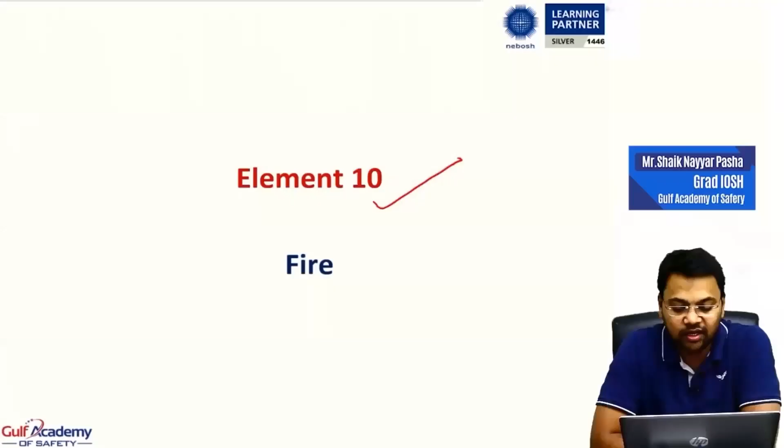The next element we are going to start is element 10, about fire safety. This data is collected from the National Crime Records Bureau, covering fire accidents that happened in India—not every fire accident is included here. I have only selected about 10% of all the fire accidents that happened in India.

On December 8th, 2019, 43 people were killed in a gruesome fire accident in Delhi. 23 students were killed in a Takshashila complex Surat coaching center fire accident in May 2019. In February 2019, a massive fire on the 5th floor of Arpit Palace, Karol Bagh, killed 17 people. 50 cars were gutted in an Aero Show fire, a similar incident in Bengaluru on February 23rd and 24th, 2019. According to sources, the fire started from dry grass and spread rapidly due to strong winds.

13 workers died in a chemical explosion in Mumbai on August 13, 2019. 5 were killed in a Pune cloth godown fire in May 2019. 5 were killed in a Dibrugarh house fire in 2019, triggered by a burning candle. 43 were killed in a massive factory fire in Delhi in August 2020, last year—many victims died of suffocation and smoke inhalation in a building with no ventilation. 9 people died in a cloth godown fire accident in Delhi in December 2019.

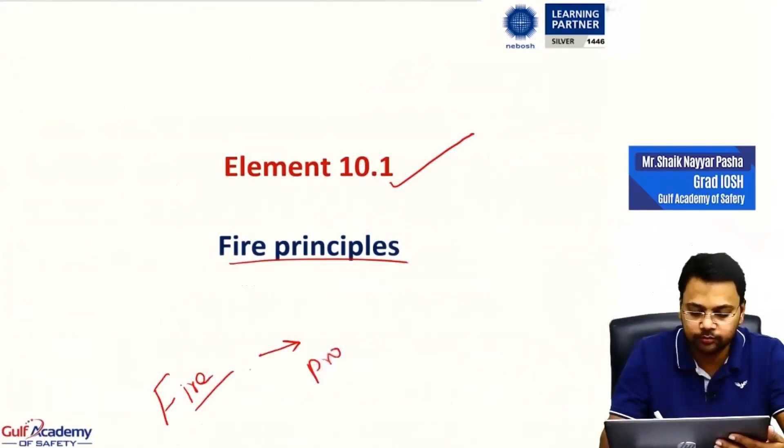So the first topic of our 10.1 is fire principles. Let us first discuss what we mean by fire. Fire is nothing but a product—fire is a product of a chemical reaction known as combustion.

This happens when oxygen, heat and fuel combine. If you take the definition in reverse, when oxygen, fuel and heat combine, there is a chain reaction known as combustion, which releases a product known as fire. So that is the proper definition for fire: fire is a byproduct of a chemical reaction known as combustion when oxygen, heat and fuel combine.

After looking at this definition, we get two important points to note. One, a fire can only start if oxygen, heat and fuel are present—meaning to start a fire, there must be oxygen, fuel and heat. If any one of these is missing, the fire will not start. So we can prevent a fire accident by maintaining a safe distance from oxygen sources, heat sources and fuel sources.

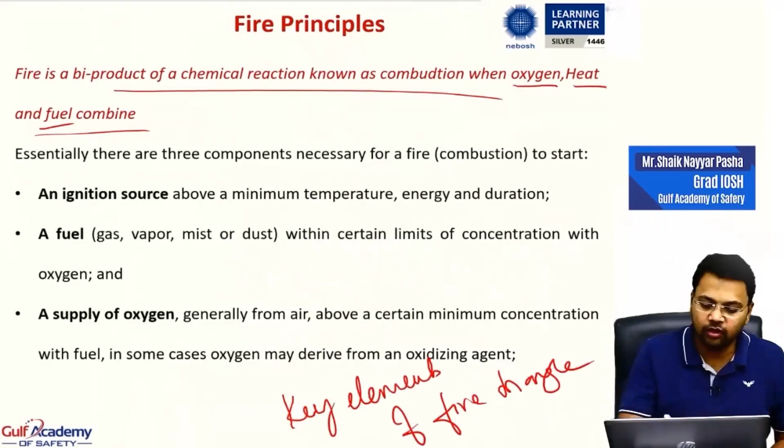Now, what are these three called? What is oxygen, heat and fuel? These three are called the key elements of the fire triangle. So now let us see once again.

Oxygen, fuel and heat are called the key elements of the fire triangle. If you want to start a fire, these three are compulsory, and if you want to stop a fire, remove any one of the items and the fire will stop.

Now, what are the sources of oxygen, heat and fuel? The oxygen source means where can we find oxygen. Oxygen is present in the environment, in ventilation systems, in compressed oxygen cylinders, and some chemicals known as oxidizing agents.

So all these are the sources of oxygen. Now what are the sources of heat? Smoking, mechanical heat, metal grinding works, metal cutting works, hot work, welding activities, open burners, radiation, electrical sparks, short circuits. All these are sources of heat.

What are the sources of fuel? There are different types of fuel such as petrol, diesel, kerosene, LPG, CNG, wood, cardboard, paper. All these are the different sources of fuel.

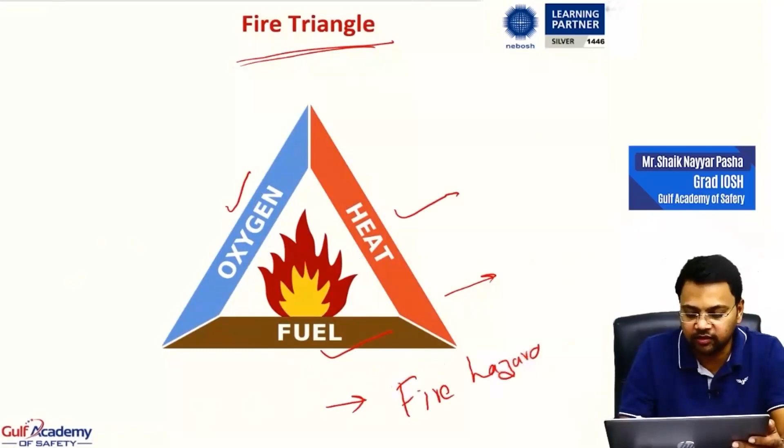The sources of oxygen, heat and fuel are also called fire hazards. If there is a fuel source, any heat, and any oxygen, then that will definitely start a fire in the workplace. That is the reason why they are called fire hazards.

Let us see the sources of heat, fuel and oxygen in detail. Sources of oxygen: oxygen present in the environment, in the air, compressed oxygen cylinders, ventilation systems, and some chemicals called oxidizing agents. All these are the sources of oxygen.

Now sources of heat or ignition: naked flames from boilers or smoking, sparks from static electricity, hot surfaces from grinding, welding and cutting activities, sparks from metal grinding, sparks from electrical equipment, heat from heaters due to poorly maintained equipment, which gets heated up resulting in ignition.

Hot surfaces from overloaded or overheated electrical equipment. Apart from that, radiation from the sun or from equipment is also a source of ignition.

Now, sources of fuel. As we discussed, there are different sources of fuel: kerosene, petrol, diesel, paint, thinner, wood, charcoal, plastic, aluminium, sodium, magnesium, kitchen fires. There are many different types of fuels available.

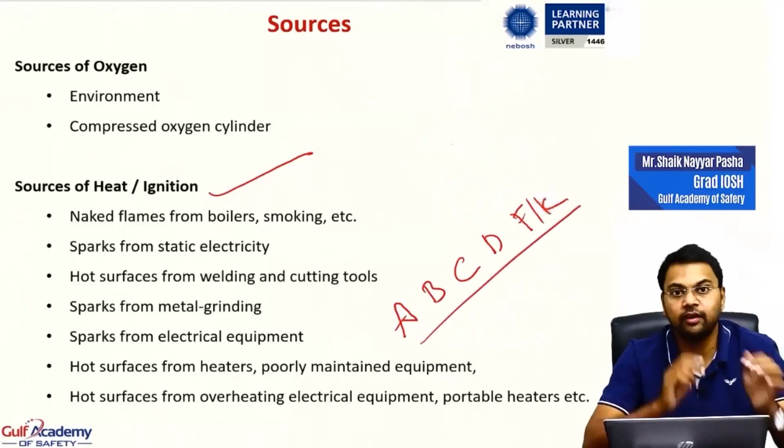Now you know fire has a classification. If you have seen a fire extinguisher, you might have seen something like A, B, C, D, F or K. This is nothing but the classification of fire.

If the fuel is solid, the fire is classified as A. If the fuel is liquid, classification B. If the fuel is gas, classification C. If the fuel is metal, classification D. If the fire is due to cooking oils, it is F or K. So based on the fuel, the fire is classified.

Let us see in detail about the sources of fuel, or classification of fuel: solids class A, liquids class B, gases class C, metals class D, kitchen fires F or K.

Solids: wood, paper, cotton, coal, cardboard, plastic, rubber. Liquids: petrol, diesel, kerosene, alcohol, thinner, solvent, sanitizer, spirit. And there are also gases, metals and kitchen fires. This is how fire is classified based on the fuel.

Now, as you know, once fire starts in a workplace, it won't stay at one place. It starts spreading from one place to another, burning anything that comes into its path. Let us look at how fire spreads from one place to another.

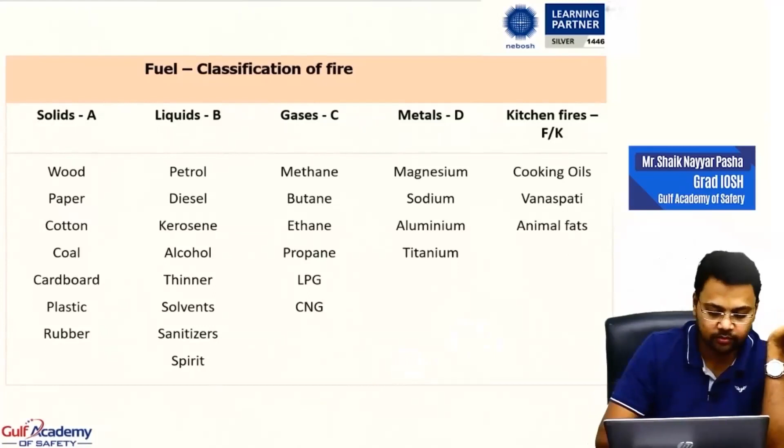Generally the fire starts spreading in four different ways: convection, conduction, radiation and direct burning.

Let us see how convection happens. Let us suppose a fire started in a building.

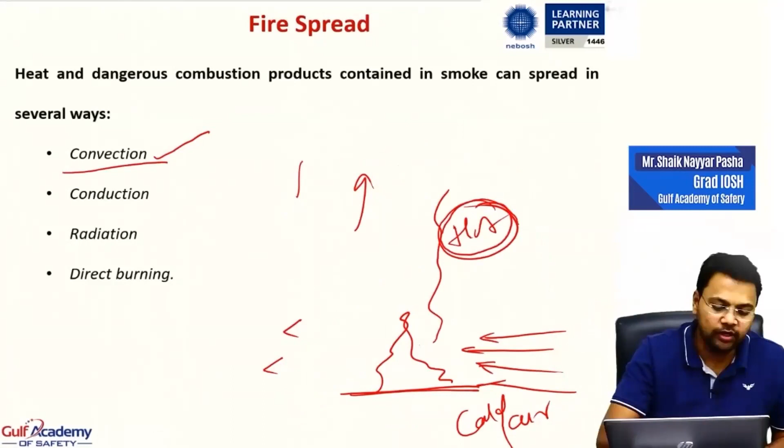Now what happens is, cold air is pulled into the fire and then it turns hot and rises into the upper atmosphere. So cold air is pulled into the fire and released into the environment in the form of hot air, and if there is any combustible material, the fire starts igniting that area as well. The way in which fire spreads with the help of hot air rising up is called convection.

Fire, cold air pulled into the fire, heats up and releases into the upper environment. If there is any flammable material, it will start there as well. So that is convection.

And the other way is conduction. Conduction is nothing but mainly through the atoms. So if you are taking an iron rod and heating it from one end, what happens? The heat gets transmitted from this area to this area. Slowly the iron rod gets heated up completely. So this way of fire spread is nothing but conduction.

So mainly in buildings where there are metal pipelines connected, if a fire starts in this apartment, the metal pipeline gets heated up and the heat gets transmitted to the top as well as the bottom, starting the fire in the below apartments or above flats. So that kind of fire spread is conduction. You start heating up a metal, heat gets transmitted from this end to this end. So that spread is conduction.

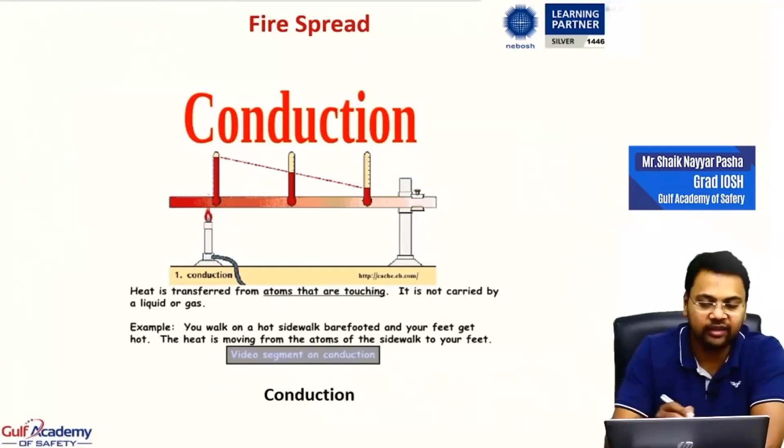And the other one is radiation. The spreading of fire with the help of hot waves or heat waves radiates through thermal energy. You know how wildfires start in the forest? Radiation from the sun. The sun rays fall onto dry vegetation and there is sufficient oxygen available - heat, fuel and oxygen. That is how fire starts spreading in that area. So that kind of fire spread with the help of thermal energy or heat waves is called radiation.

And the most common method where fire starts spreading is when you start loading boxes one on the other, mainly in storage areas or buildings where carton boxes are stored one on the other. If a fire starts lighting up a box here, due to direct contact with the other boxes, all the above boxes will also start burning. So that type of fire spread is known as direct burning - boxes loaded, fire starts with one box, it will burn all the boxes in the workplace. This is how fire starts spreading from one place to another.

So these are the four ways through which fire can start spreading: one is convection, conduction, radiation and direct burning.

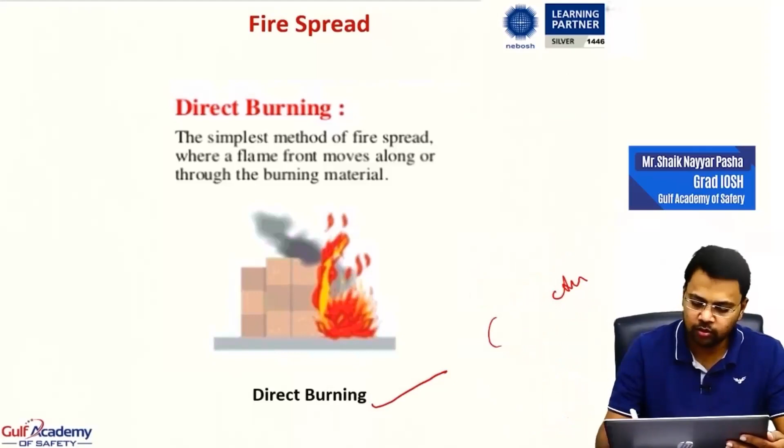Now let us discuss the common causes of fires in the workplace. When we discuss common causes of fire in the workplace, we will be discussing both accidental fires and deliberate ignition, meaning wantedly starting a fire. So there are two types of fires that might be started in the workplace: accidental fires and deliberate ignition, or you can call it common causes of fire.

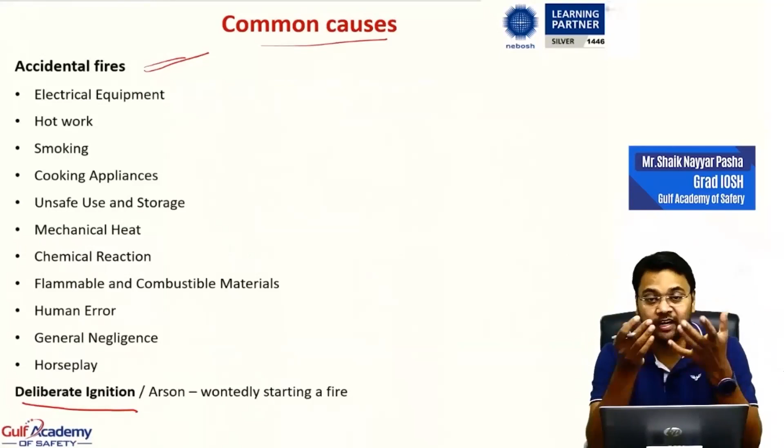Accidental fires - unfortunately a fire might start in the workplace. Some reasons of accidental fires are using faulty electrical equipment or overloading electrical sockets, or poor inspection and maintenance of equipment which might lead to overheating, or carrying out hot work activities such as welding, due to which a fire might start, or because of radiation, or grinding activities. When we grind metals, there are sparks that come out, and these sparks might ignite a flammable substance and a fire might start, or because of burners or gas burners left unattended, which might lead to a fire accident in the workplace.

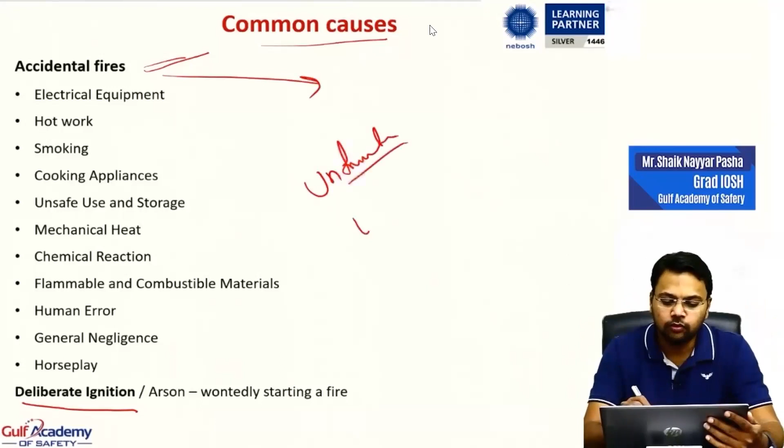As we already discussed in our fourth element, accidents are unfortunate or unplanned events. So if a fire starts unfortunately or undesiredly, meaning nobody wantedly does it, such fires are called accidental fires. For example, usage of electrical equipment while carrying out hot work activities, or because of smoking - somebody smoked and threw a cigarette butt in an area where there might be a flammable substance.

That is even an accidental fire, because nobody throws a cigarette butt wantedly to start a fire in the organization. So accidentally, cooking appliances unattended, unsafe usage and storage of flammable substances, mechanical heat, chemical reactions such as sodium coming into contact with water can start a fire accidentally.

Presence of flammable and combustible materials near any activity which might be releasing sparks will also lead to fire accidents. Simple human error, general negligence, horseplay. Horseplay is nothing but playing, playing some pranks. You might have seen many birthday videos where the birthday celebration gone wrong. Horseplay means playing pranks in birthday parties or in some kind of events, and even that might start a fire accident in the workplace.

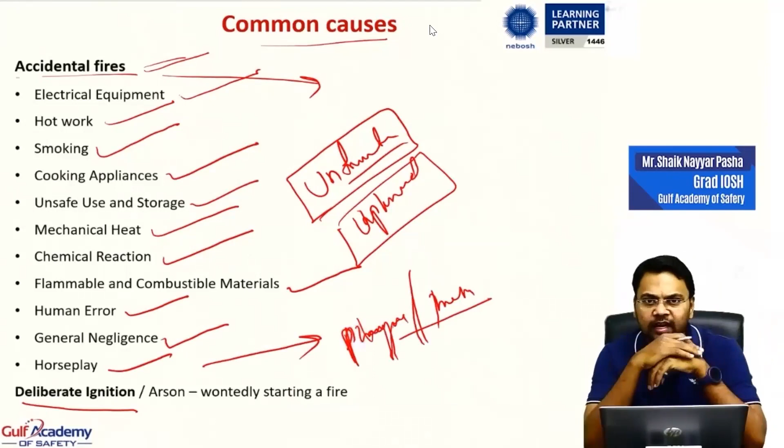So all these are accidental fires because nobody plans it. Unfortunately, something might go wrong which might ignite something in the workplace, that is accidental fires. Deliberate ignition - deliberate means wantedly, ignition means starting the heat or fire. So that is called deliberate ignition: planned, wantedly lighting up something to burn or damage somebody's property. Such kind of fires are called deliberate ignition or arson, wantedly starting a fire with the intention of damaging somebody's property. So these are all the common causes of fire in the workplace.

Now once a fire starts in the workplace, there are worst consequences. There might be fatal injuries, there might be death due to suffocation from toxic gases released because of combustion, or the structures get collapsed, the structures fall. Why? Because the buildings and pillars, you have metals, or many materials such as insulating materials like paint, cardboards, asbestos sheets or fiber sheets.

All these are combustible materials. So what happens when the fire starts, the structures get deteriorated, meaning they get weak, because of which the structures might collapse. If there are any people, they might get buried under the collapsed structures. Even that is a reason for deaths in workplace fire accidents. Very few people die because of burns - majority of deaths mainly happen due to breathing toxic gases. So death is likely possible.

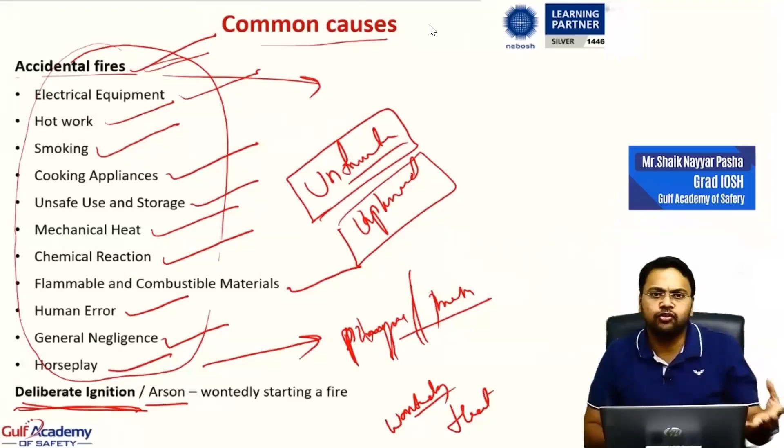Then damage to the environment, damage to stock, damage to property - all these are other losses. Apart from that, loss of life or loss of jobs, loss of healthy income, loss of reputation. So all these are the consequences of a fire accident.

Consequences: people get killed and injured. Majority of people are killed in a fire accident due to suffocation and inhaling toxic gases and structural collapse, and very few people might die because of burning. If they are trapped, if there are no proper fire exits, they don't have any place to escape - in that case, very few people die because of burning.

Apart from the damage to buildings and contents including smoke damage, environmental damage, water runoff - a lot of wastage of water for putting off a fire, smoke releasing into the environment can damage the environment, you cannot breathe properly. So all these are the consequences of a fire if it starts in a workplace.

Now, obviously, fire is a hazard. Why? Because it can cause us harm. So definitely it is the responsibility of the management to carry out a fire risk assessment and to implement precautions. First of all, fires can be prevented in the workplace - our main motto is to prevent a fire, not to extinguish it. Prevention is always better than cure, so instead of finding a cure, first try to prevent fires in the workplace. Now let us see how a risk assessment has to be carried out and what precautions can be taken to reduce the risk of fires in the workplace or to prevent them.

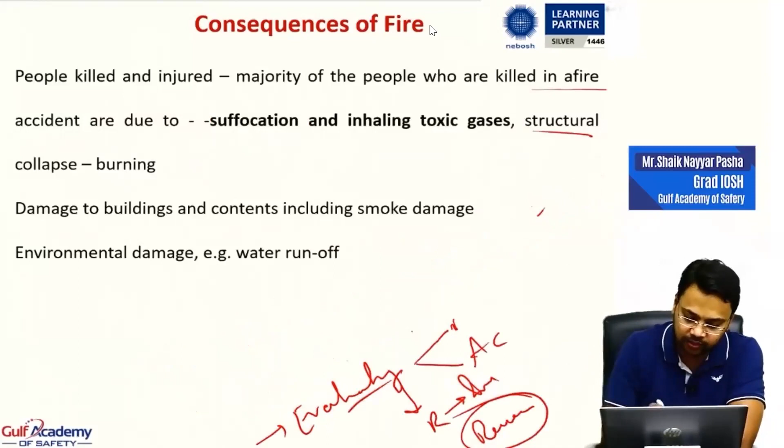So all these are the steps of fire risk assessment. Now let us see what controls can be taken to prevent fire and fire spread in the workplace. Fires can be prevented in many ways, such as eliminating hazards. While implementing control measures, you need to think about the hierarchy of risk control.

The best option is to eliminate the fire hazards, eliminate the sources of oxygen, eliminate the fuel sources, eliminate the ignition sources. Stop carrying out hot work activities, stop doing welding activities, stop doing metal grinding and cutting works, stop using burners or gas stoves. But is it always possible? No, it is not always possible. So stop using flammable substances like petrol, diesel, kerosene, paint, and solvent.

Elimination is always not possible. Oxygen becomes very difficult to eliminate because it is present in the environment, or in compressed oxygen cylinders. For example, in a hospital you can easily find compressed oxygen cylinders. Is it possible at hospitals to eliminate the oxygen cylinders? So elimination is not always possible. Then what should I do?

Control the oxygen sources, control the ignition sources, and control the fuel sources. How can I control the sources? For example, if there are compressed oxygen cylinders, make sure these are used or operated only by competent people, and are stored in a designated area, properly enclosed, kept away from flammable substances and locked off so that no unauthorized people can enter, and always reduce the quantity to the minimum.

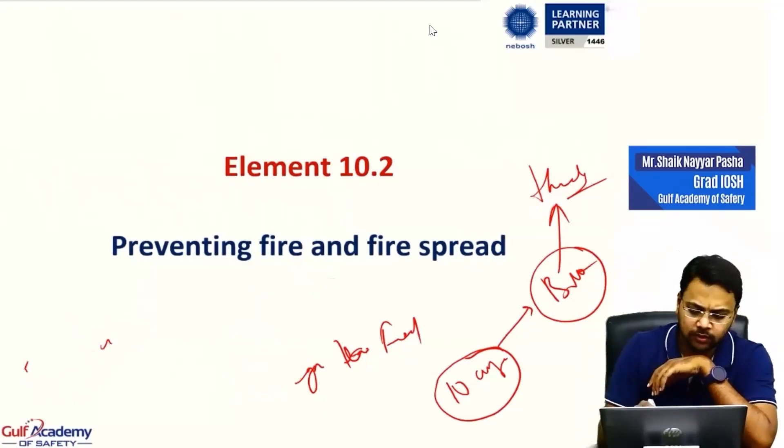Now controlling the fuel sources - again reduce the quantity of flammable substances that is needed. Same thing, if you need 10 liters of petrol, only buy 10 liters. If you buy 100 liters, this 10 liters will be used, but the remaining 90 liters is a potential fire hazard. If you always need to have enough quantity for your organization to use...

...in that case again storage in designated areas, away from any heat sources. Make sure when storing flammable substances there is intrinsically safe lighting, meaning flame proof lighting should be installed, proper signboards should be there, and fence or barricade the area with locks. Make sure near the storage of petrol or flammable substances, fire extinguishers are available.

Only allow competent people to use them. Store empty containers separately and filled containers separately. That is how you can control the fuel sources - solid, liquid, gases, metals or kitchen fires. Or you can use low flammable substances instead of highly flammable ones. That will also reduce the risk. That is how you control fuel.

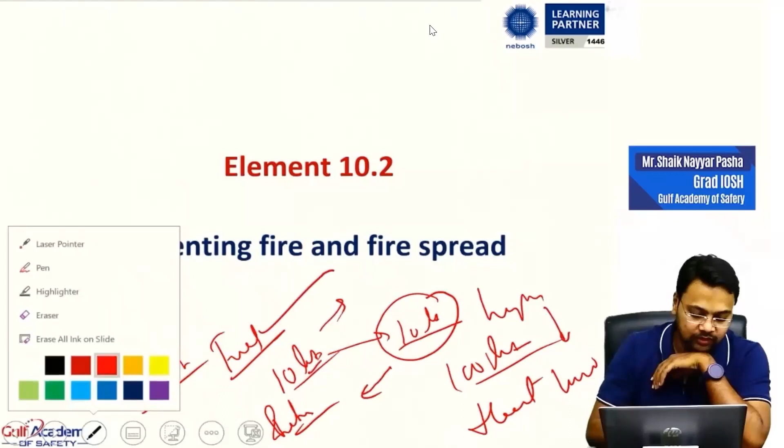Now controlling the heat sources. Controls on heat sources, in the sense having a formal permit to work and making sure all the controls are implemented. Don't leave gas burners unattended, and make sure there is a proper controlling system so that as soon as you switch it on, the flame does not go high. Make sure you are controlling with some valves.

The cylinders that we use, the stuff that we use, there is a control or a valve where you can switch it on and raise it to a high flame, or put it to a low flame. So put some controls on it, and controls on metal grinding work - never overload the electrical sockets.

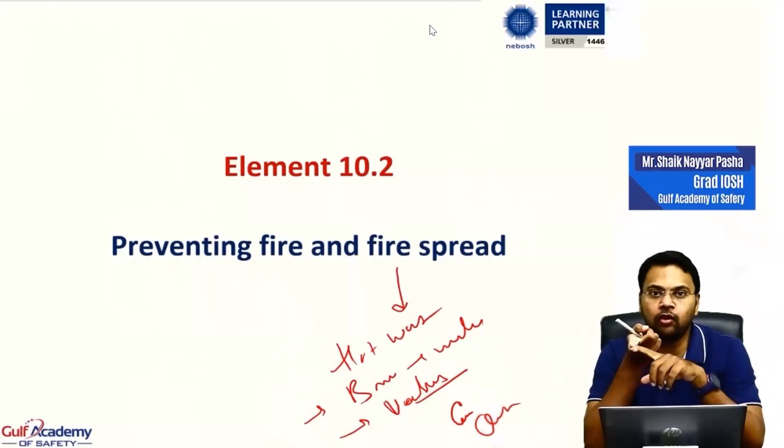Make sure that inspection and maintenance is carried out for all electrical equipment. Ensure there is no negligence. Provide information, instruction and training to all workers on how to handle electrical equipment, using it in the right environmental conditions. Make sure all the cabling is done properly. Any equipment which produces sparks should be immediately replaced or repaired.

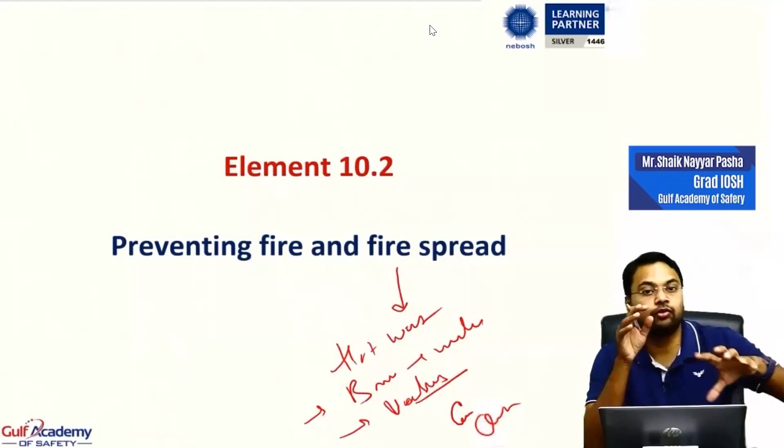And one more important thing - housekeeping. Proper housekeeping can prevent fire accidents. Cleaning up the dustbins and throwing the waste away from the building, meaning not inside the building.

Why? Because most organizations' housekeeping staff don't throw out waste daily. It's difficult for them, so they load all this scrap or waste into boxes and keep it in an isolated area. Generally the isolated areas are fire exits, because they are never used. So they pile up this waste near the fire exits. In case a fire accident happens, the fire exit gets blocked and we cannot escape.

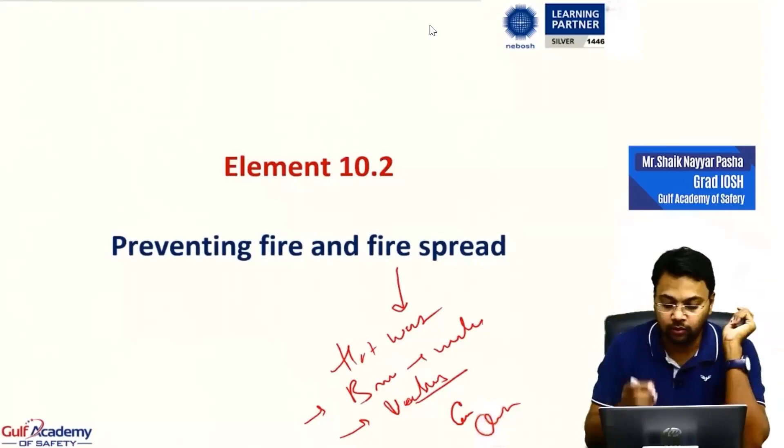If housekeeping is good, it prevents fire accidents. If it is not good, it might be a barrier between you and your evacuation point. So proper housekeeping, keeping corridors neat and clean, throwing waste out of the building every time. Particularly if there are flammable liquids, they should be marked as flammable or hazardous and thrown away, or go for safe disposal.

Let us see. Elimination, or at least reduce the quantities. Control the ignition sources, including electrical equipment and flammable atmospheres, using safe systems of work and good housekeeping. All these measures can be taken to prevent fire accidents in the workplace.

When oxygen, fuel and heat combine together, there might be fire. So make sure there is a safe distance between all these three things. Never allow these things to come into contact with each other, because fire will start. So controlling ignition sources, oxygen sources and fuel sources will definitely prevent fires from starting in the workplace.

Apart from that, the building itself plays an important role. It can either stop the spreading of the fire, or if not properly planned, allow the fire to spread rapidly. Consider the structure of the building. Suppose there are two buildings, and in one there is no compartmentalization, meaning no cabins or working platforms. If a fire starts in an area, there is no barrier to stop it, so the fire will start spreading rapidly throughout the area.

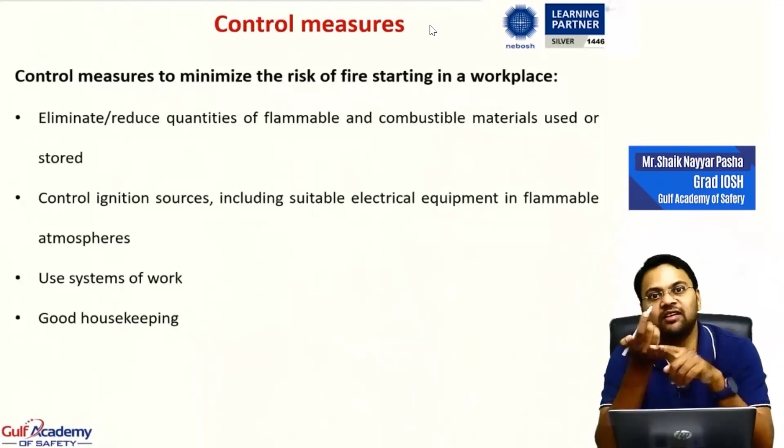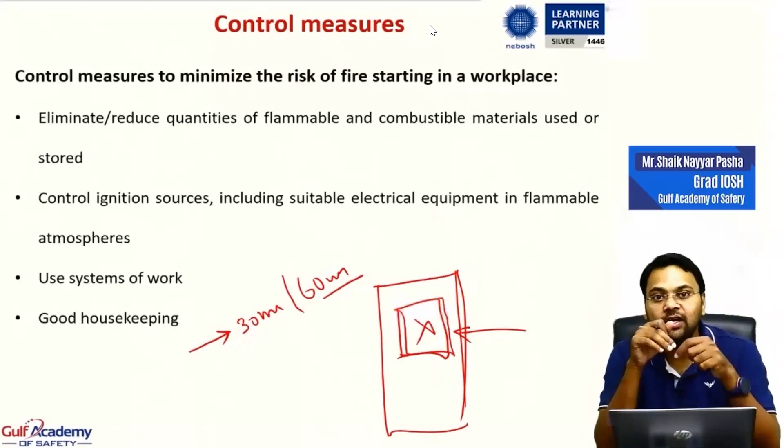So that is about the building structures. The door should be able to withstand fire for 30 minutes, or 60 minutes for compartments, and the door should be fitted with a vision panel, meaning a glass panel fitted to the door that is fireproof. If it is not fireproof, the heat generated by the fire might break the glass and the fire might escape. It should be fireproof glass so that if firefighters come, they can see through the glass to assess the exact situation and plan for firefighting or extinguishing the fire.

Let us discuss the fire door properties in detail. This is the fire door. The thickness of the door should be enough to withstand fire for 30 or 60 minutes, and it should be clearly labeled as a fire door. It should also be fitted with an automatic closer.

Why? Because during a fire accident, we might be in a hurry to evacuate as soon as possible to save our lives. Sometimes in that hurry, we might forget to close the door, and if the door is not closed, there is a higher chance the fire might spread rapidly. That is why it should be fitted with a door closing system and a handle lock, so we can push or pull it.

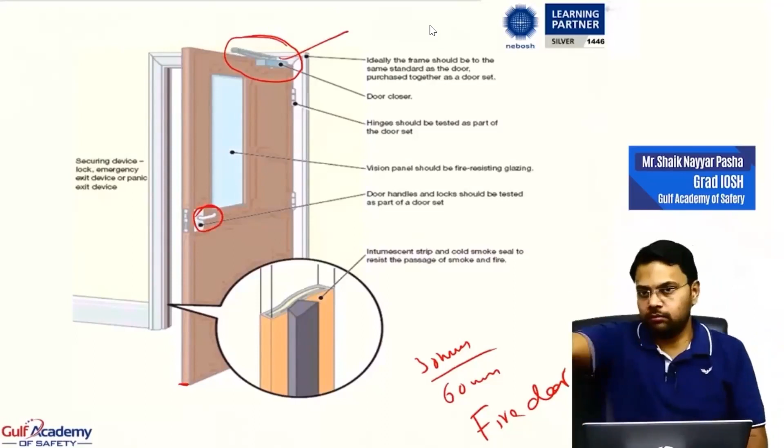It should have a vision panel with flame-proof glass, and even the frame of the door should be fitted with silicone sealant, called intumescent strips. These strips are fitted to the door panels. Their purpose: when you close the door, there might still be a small gap across the edges. As soon as the fire starts and the temperature heats up, these silicone strips expand, closing the gap between the door and the frame so the fire or smoke cannot escape.

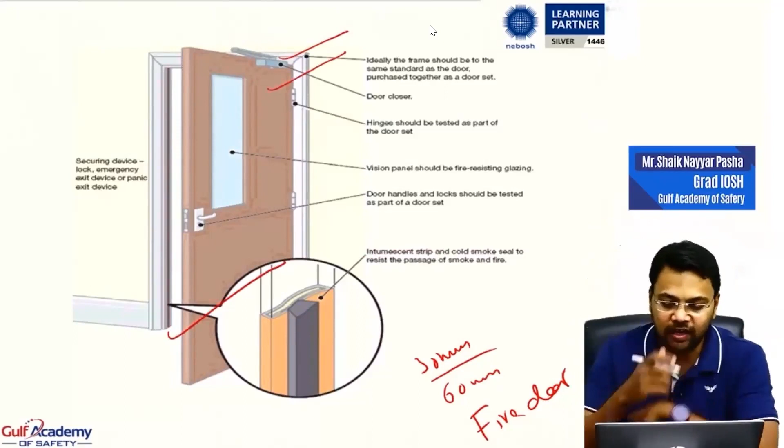So these are the basic requirements or characteristics of a fire door, fitted with hinges. Hinges should be tested as part of the door set, and you need to check whether they are blocked or rusted, because sometimes rusting in the hinges might prevent the door from opening.

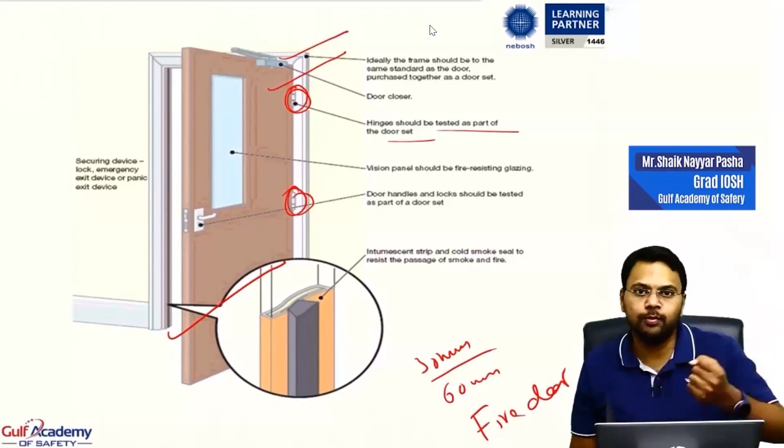So it should be regularly inspected and tested whether it is easily openable and closed or not. So those are the properties or characteristics of a fire door, not fire exit, fire door.

Now other materials of the building - concrete is usually very resistant to fire and does not collapse catastrophically. It might spall, meaning because of huge fire some chips might fall off, but it will not completely collapse. Steel is severely affected by high temperature. On the roofs or in the pillars you have rods, hardware. When the temperature rapidly increases, metal starts losing its structure. It might start melting or bending, because of which the structures get weak and collapse.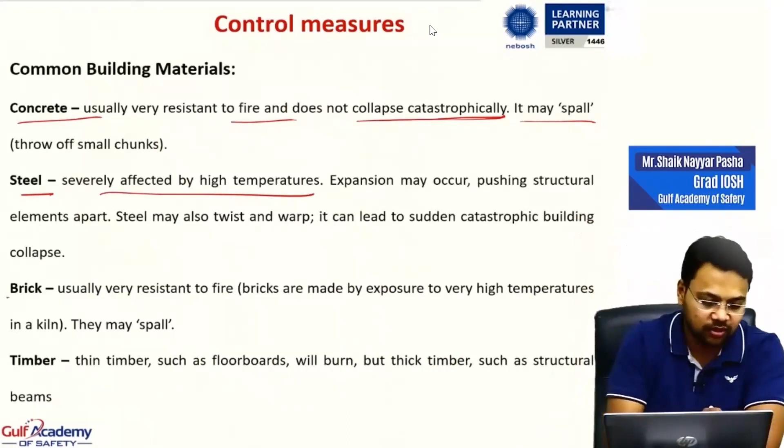Bricks are generally flame proof. Why? Because they are burnt to extreme, very high temperatures in a kiln. They may spall, meaning they might slowly start dropping some chips of it, but they will definitely not catch fire.

Timber, furniture, or the shelves - timber means the furniture or the thin sheets or plywood sheets or any of the wood material used for decorating or furnishing. Those are flammable, so immediately they might catch fire. So these are the common building materials.

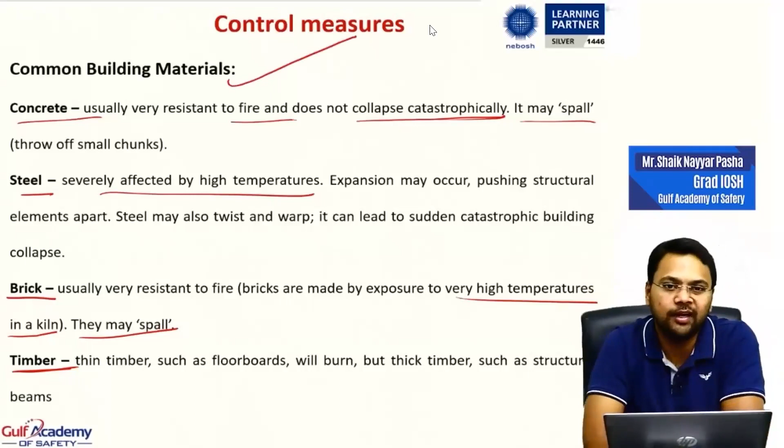Insulation and wall coverings. Wall insulation, such as painting - whatever paint you use, that is a solvent that can be flammable. So whenever you are going for painting or insulating the walls or anything, make sure you are using flame proof paint. Even when going for false ceiling, make sure the material is flame proof. Nowadays in the market there are a lot of materials - termite proof, weather proof, heat proof, or even flame proof. You can find many materials. So use such kind of material for insulating the walls.

Wall coverings such as wallpapers - many people have wallpapers nowadays. Make sure these wallpapers are also flame proof so that we can prevent the spread of fire. So all these things come under preventing fires in the workplace.

Now, as an employer, you have done the risk assessment, implemented all the control measures, properly created awareness to all the workers, and provided proper training. Can you give us a guarantee that fires will not happen in the workplace? No, there is no guarantee. Why? Because if a hazard cannot be eliminated, the risk can only be reduced. Still there is some risk, so there might be some unfortunate situations. Fire might still start.

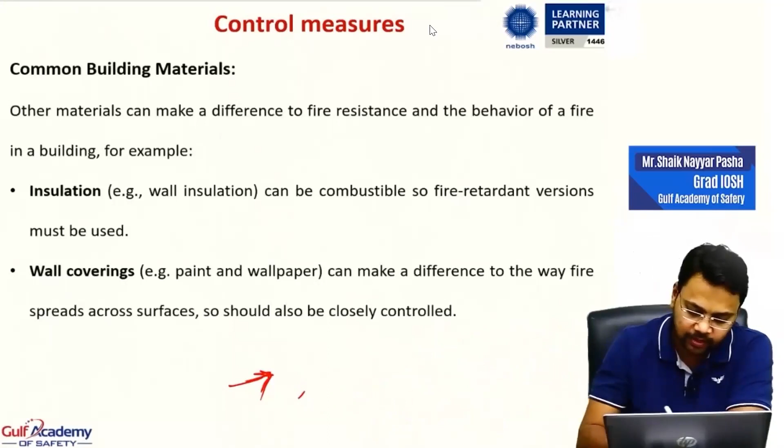Now, once the alarm is raised, there is deciding about fighting the fire, meaning extinguishing it, or going for an evacuation. So there should be measures for firefighting and also measures for evacuation procedures. Now let us see firefighting and emergency evacuation in the workplace.

Element 10.3: Fire alarms, firefighting. If firefighting is not possible, fire evacuation. Now fire alarms - what needs to be done or what arrangement should be there? There should be detectors, a detection system. There are two types of detectors: smoke detectors and heat detectors.

Once they are detected, how to raise the alarm - these procedures should be there. Why should they be available? So that the fire can be detected, the alarm can be raised, all other workers can be alerted, and the fire marshals or fire department can take charge of the situation in fighting the fire or evacuating people nearby. That is the purpose of fire alarms and fire detection systems. Why are fire detection and alarm systems required? Fire detection and protection systems are required for the following reasons.

To detect the fire in the initial stage, to alert the occupants so that they can escape the building safely, to ensure trained personnel take charge of controlling the fire as quickly as possible, to initiate automatic fire control or suppression systems such as automatically alerting the sprinkler system to sprinkle extinguishing media so the fire can stop, and to support and supervise fire control and suppression systems. These are the reasons why fire detection and fire alarms are needed.

Now, how many types of fire detectors are there? There are two types of detectors used. One is the smoke detector and the other one is the heat detector.

Smoke detectors are very sensitive, so they can immediately detect small amounts of smoke, which will raise an alarm immediately so that the fire can be detected in its early stages. They have sensors that use alpha particles or electromagnetic radiation. So what they do is immediately detect the fire and raise the alarm.

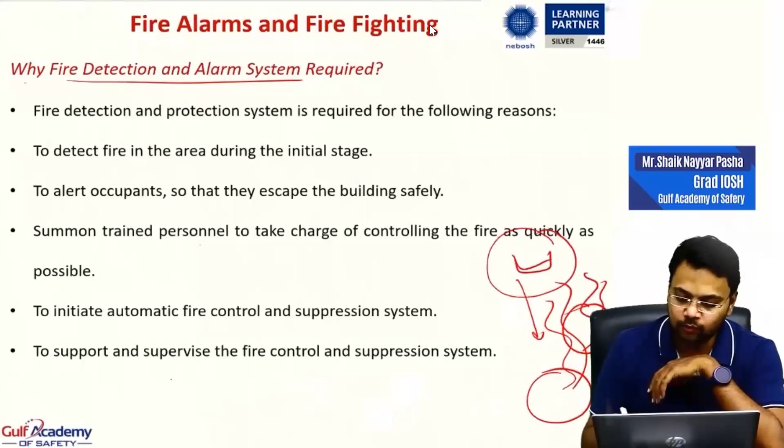Smoke detectors detect small smoke particles. There are two main types: ionizing and optical, and they can give rise to false alarms. Now, heat detectors. Heat detectors are of two types: one is rate of rise and the other is fixed temperature.

Heat detectors detect excess heat generated by a fire, meaning they won't detect any smoke. They only detect heat, so they are usually less sensitive and give later warnings. This is because fires that start from small smoke cannot be detected by heat detectors. Rate of rise means that if a fire starts in a building, the temperature slowly starts rising, so the detector will detect the variation in temperature and raise the alarm.

The fixed temperature type means the temperature is fixed for a particular heat detector, and only if the temperature of that area reaches that point will they raise the alarm. So that is the disadvantage. Sometimes this might give late alarms, and by the time the fire department goes to try to extinguish it, it might be too late.

So there are two types: rate of rise and fixed temperature. These may not detect fires that give off smoke but not heat. For example, suppose you are ironing clothes and you forget your iron box. A huge fire won't start immediately; it slowly starts smoldering, smoke slowly starts coming, and slowly, without excess heat, it starts burning. So for such fires, heat detectors won't work.

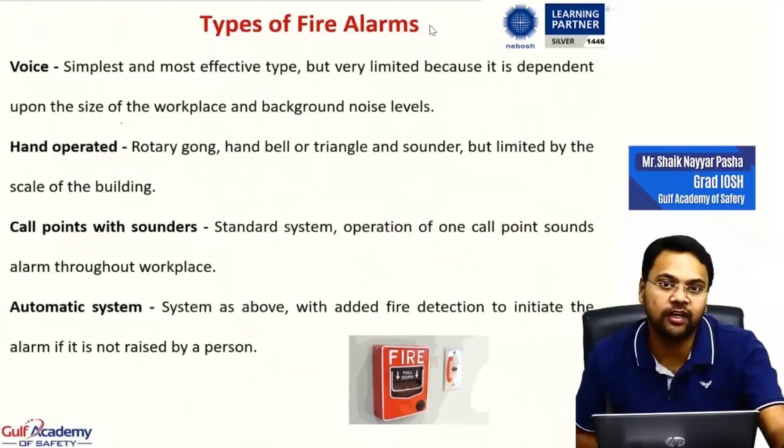Now once the fire is detected, once the alarm is raised, there are two things: the procedures to deal with extinguishing the fire, or the procedures to evacuate the building. So now let us discuss firefighting equipment, or how we can fight the fire, or what factors need to be considered that can decide whether you should fight the fire or evacuate the area.

There are different types of firefighting equipment available in the market. Based on the requirement of the organization, they can use this equipment: fire extinguishers, fire hydrant, fire blankets, fire hose and fire buckets. So these are some of the common firefighting equipment that you can see in the workplace.

The most commonly seen are fire extinguisher, fire hydrant and fire hose. Now there are different types of fire extinguishers. Fire extinguishing media means the material or substance present in the fire extinguisher. There are water based fire extinguishers, carbon dioxide based fire extinguishers, foam based fire extinguishers, dry chemical powder based fire extinguishers and wet chemical fire extinguishers.

Now how do you recognize whether it is a carbon dioxide fire extinguisher, or a dry chemical powder, or a foam fire extinguisher, wet chemical or water based fire extinguisher? There is a color coding for each and every fire extinguisher based on the extinguishing media present inside it. The most common fire extinguisher we use is the dry chemical powder fire extinguisher.

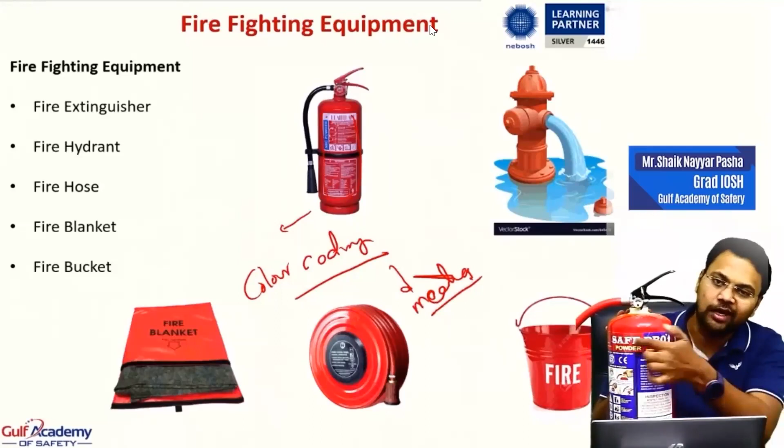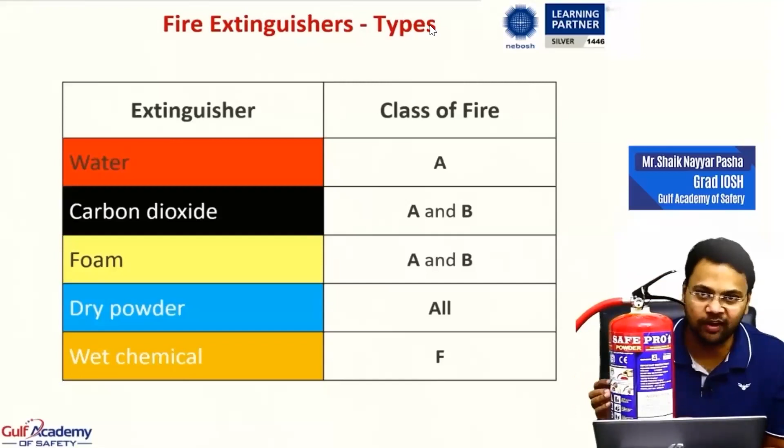So based on the color combination, you can decide or tell what is the extinguishing media present inside the fire extinguisher. That is the color coding of a fire extinguisher: water red, DCP blue, foam cream color, carbon dioxide black color and wet chemical in yellow color. These are the color combinations or color codings of fire extinguishers.

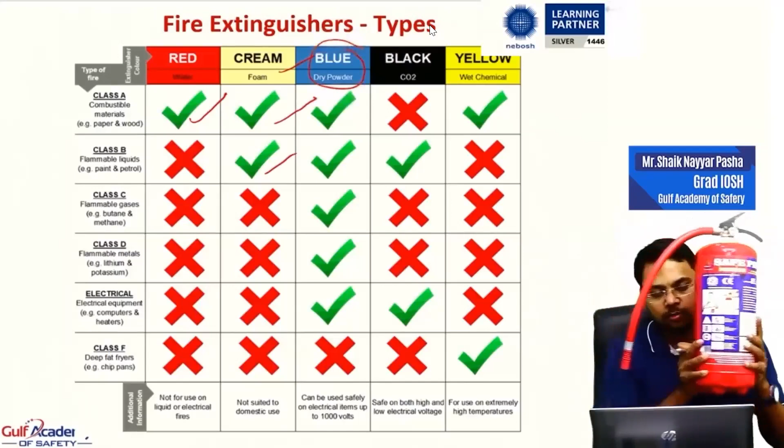Next, water based fire extinguishers can be used on solids. Foam fire extinguishers can be used on solids and liquids. The most commonly used, as I said, is the dry chemical powder fire extinguisher, because this can be used on solids, liquids, gases, metals, and electrical equipment up to 1000 volts. So these fire extinguishers can be used on electrical equipment up to 1000 volts.

But before you use a fire extinguisher, there are certain factors that need to be considered where you have to decide: should I go for firefighting or should I go for fire evacuation? It is very important to decide which one is the best option for you. What factors will you consider that will help you decide whether to go ahead and suppress or extinguish the fire, or whether to evacuate?

It depends on the fire itself. If the fire is big or huge enough, the best thing is to evacuate the area. And you need to know what fuel is burning, or what class of fire it is, as we discussed at the start of this element, the classification of fire is based on the fuel.

First of all, if you want to use a fire extinguisher or a fire extinguishing media or equipment, you need to know what is the fuel that is burning. Why? Because without knowing the fuel, you cannot decide what is a suitable fire extinguisher that needs to be used.

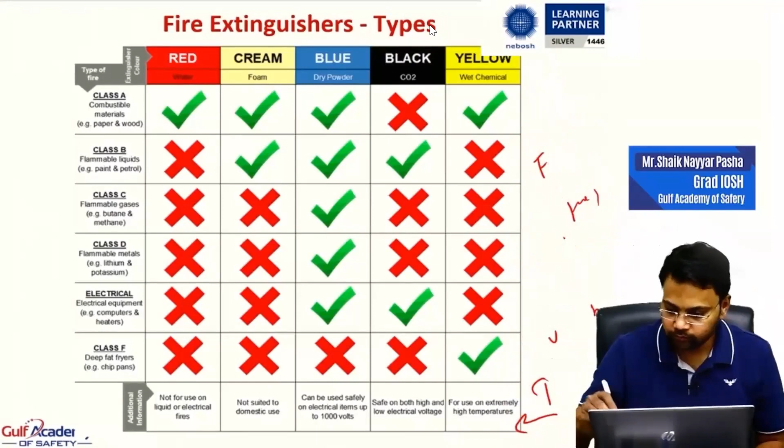So these are all the factors that need to be considered when you are deciding whether to fight with the fire or evacuate the area. Now, as I said, fire extinguishers - whenever you are inspecting a fire extinguisher, before you are using it, there are certain things that need to be checked. So let us see what are those things that need to be considered when you go for firefighting.

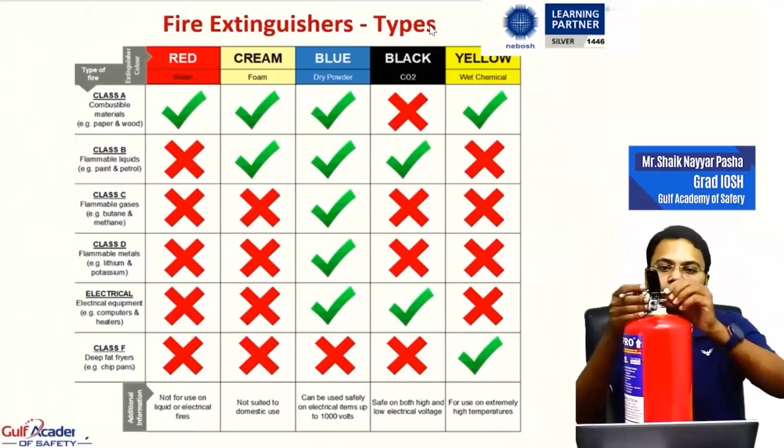I hope you can see a pull pin. This is the pull pin that is available for the fire extinguisher. So before you go for the firefighting, check whether there is a seal or not. Now this is a used extinguisher, so you won't find the seal, but there will normally be a seal here. So ensure there is a seal and it is not damaged. That should be checked. And ensure that the pull pin itself is not missing. Pull pin should always be there.

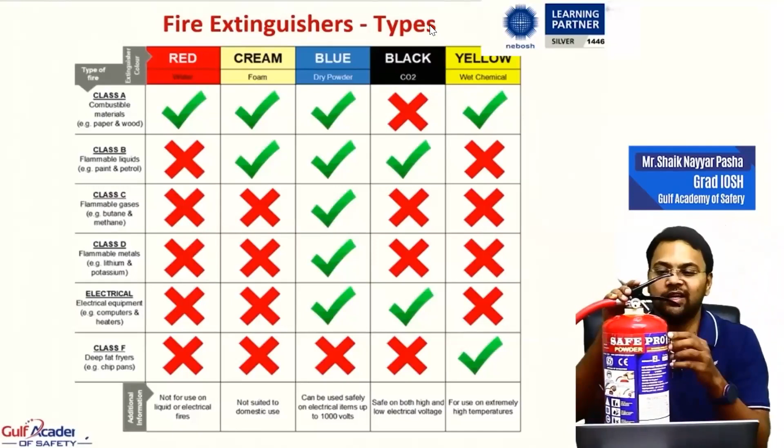And before you use a fire extinguisher, you need not have technical knowledge about it, so all the instructions are provided here itself. You need to also check the expiry date, next refilling date, and check on what class of fire this can be used. If you can see, there is A, B, C. So this extinguisher can be used on class A fires where the fuel is solid, B where it is liquid, C gases, and even that can be used on electrical fires up to 1000 volts.

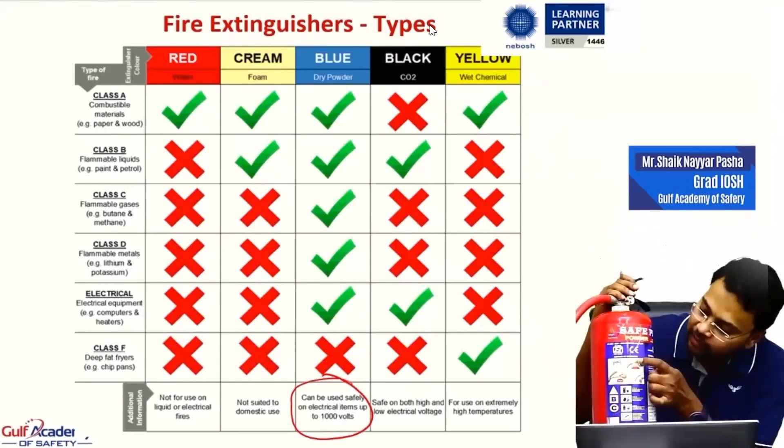As you see, the dry chemical powder fire extinguishers can be used up to 1000 volts. Even the instructions are clearly given on the product label itself, so you can simply follow these and use it, provided you have experience with it.

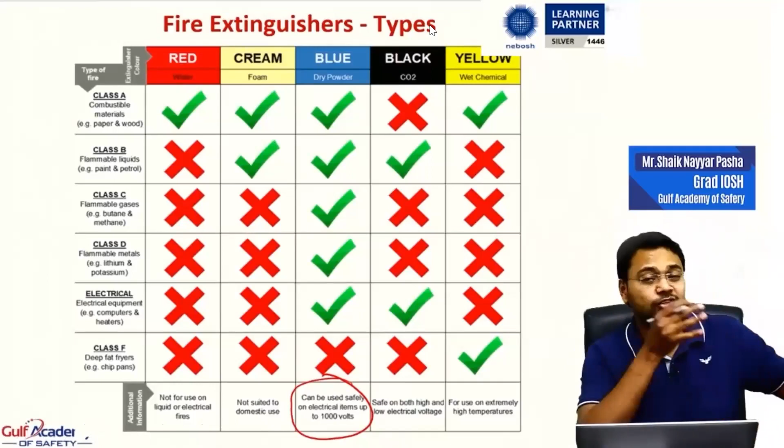The fire extinguishers, wherever you are storing them, should not be blocked. The fire extinguisher should be easily visible and easily located, and they should always be inspected and maintained to ensure they are in good working condition. So let's discuss that.

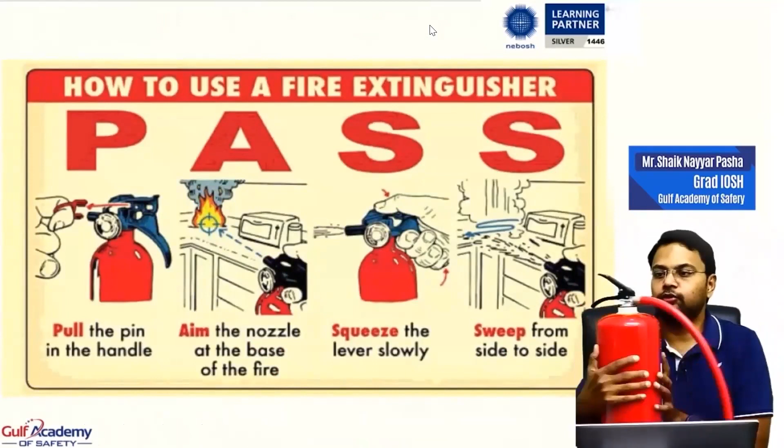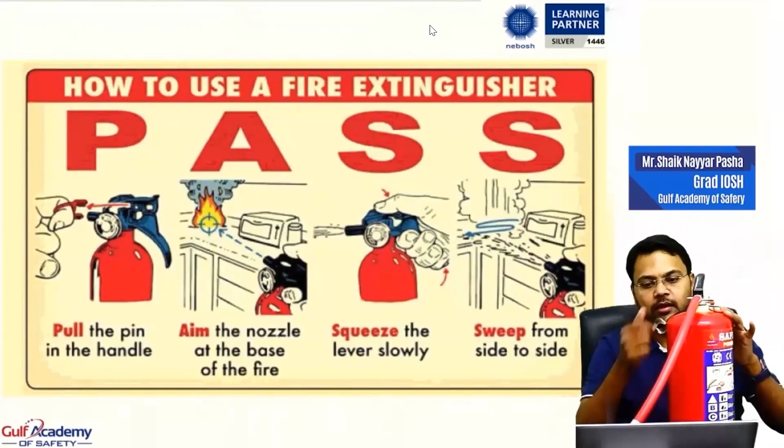How do you use a fire extinguisher? First of all, there is a principle, PASS. Break the seal, pull the pin (P), aim the hose at the base of the fire, not in the air or where the fire is burning, mainly at the source of the fire, then squeeze the lever and sweep the hose side to side. PASS: pull the pin, aim at the base of the fire, squeeze the lever, sweep side to side.

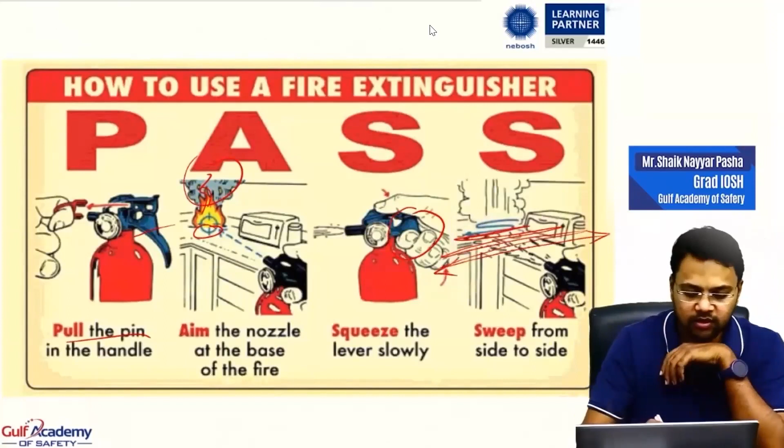Pull the pin, aim at the base, not at the flame or the smoke. Squeeze the lever and sweep side to side. That is how you use a fire extinguisher.

Now, in case your shirt or clothes catch fire, never run, because when you run, the fire gets a sufficient amount of oxygen and will intensify and spread; it will not stop. The best thing is to cover your face, lie down on the ground, and roll horizontally. Why? Because rolling on the ground stops the supply of oxygen and the fire gets extinguished.

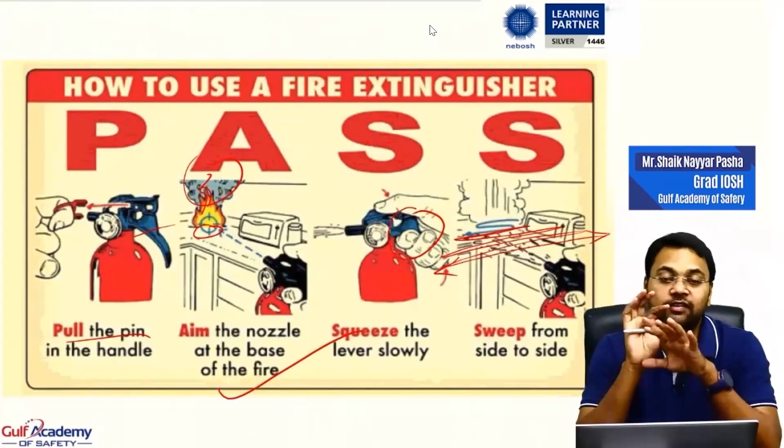Stop. Do not run, do not panic, and do not touch the fire, because you are not the hero of a movie, you are just the victim of a fire. You should not try to put off a fire with your hand. Drop to the ground, lie down, keep your legs flat and out, cover your face, and roll around. Stay away from the fire, escape safely, and seek medical help immediately if you get any burn injuries.

Stop, drop, roll. SDR: stop, drop, roll. This is what you have to do when you come into contact with fire, or when you are caught up in a fire.

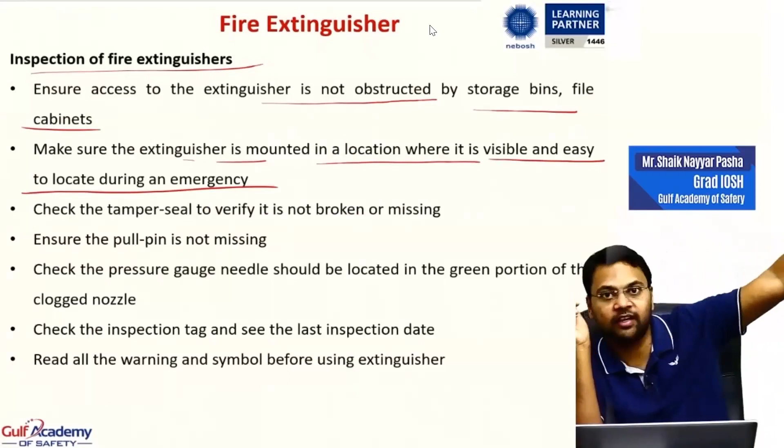Inspection of fire extinguishers: ensure that access to the extinguisher is not obstructed by storage bins or file cabinets. Make sure the extinguisher is mounted in a location where it is easily visible and easily located during an emergency, and make sure signs with arrow marks for the fire extinguisher are posted.

Check the tamper seal — in this case the tamper seal is not there because it is a used extinguisher. The pull pin is not missing. Check the pressure gauge needle; it should be located in the green portion, not the red portion. Check the inspection tag and see the last inspection date. Read all the warnings and symbols before using the fire extinguisher. This is about inspection of fire extinguishers.

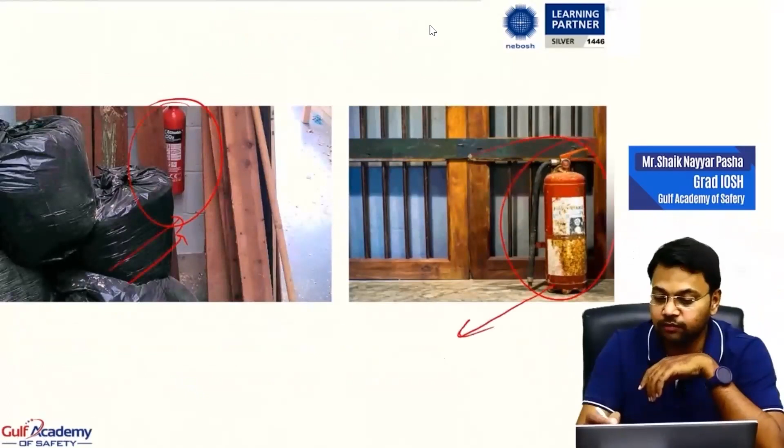All expired or empty fire extinguishers should be immediately replaced or refilled to ensure they are in good working condition. A blocked fire extinguisher by storage of waste bins, or an expired fire extinguisher that might have been installed 10 or 15 years back — you definitely cannot use this. This should not be the condition of fire extinguishers.

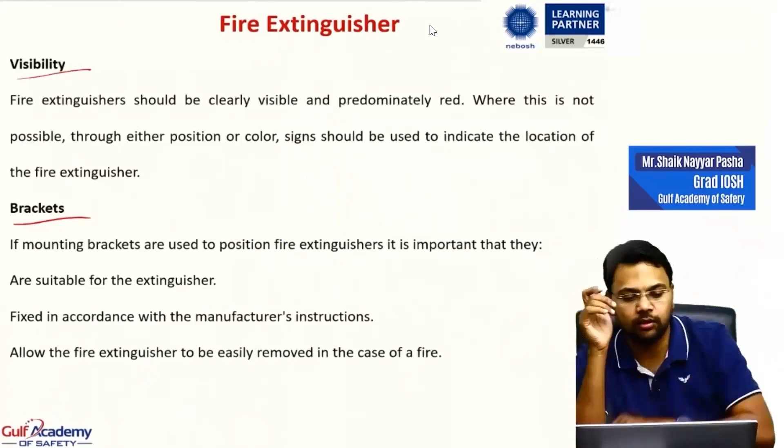Visibility and brackets: it should be easily located and easily accessible, and the color of the fire extinguisher should only be red — you cannot paint it any other color. Wall mounting brackets should be properly installed onto the wall so that the fire extinguishers can be fixed properly.

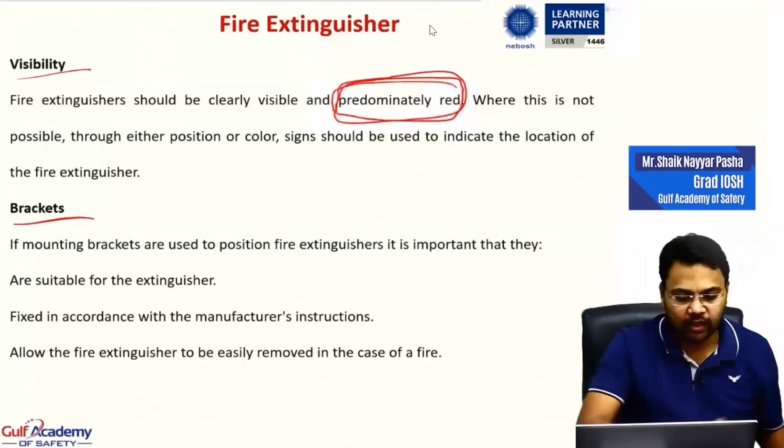Mounting the fire extinguishers: if the fire extinguisher is less than 4 kgs, it should be mounted at 1.5 meters above floor level. If it is more than 4 kgs, mount it at 1 meter from the floor. It is important that extinguishers are securely mounted onto the walls, because if not, they might fall, resulting in injuries to pedestrians.

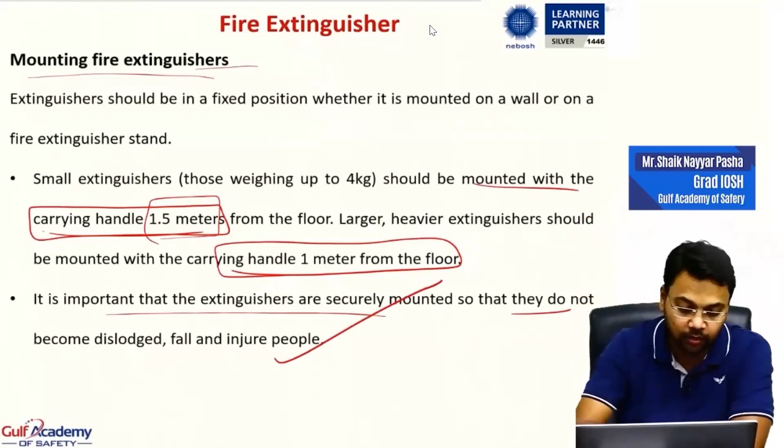Apart from that, different arrangements are needed, such as a firefighting lift. In case a fire starts, the lift should be used only by the firefighters. That is why we call it a firefighting lift. Only the firefighters can use it. Fire staircases mean the staircases used by fire officers to put off a fire.

Or firefighting lobbies, let us see them as well. So access to building for firefighting personnel includes the firefighting lift, firefighting stairs, and firefighting lobby. A firefighting lobby is, for example, if a firefighter is using a lift and coming into an area, or using a staircase and coming into the building, this area is called a firefighting lobby.

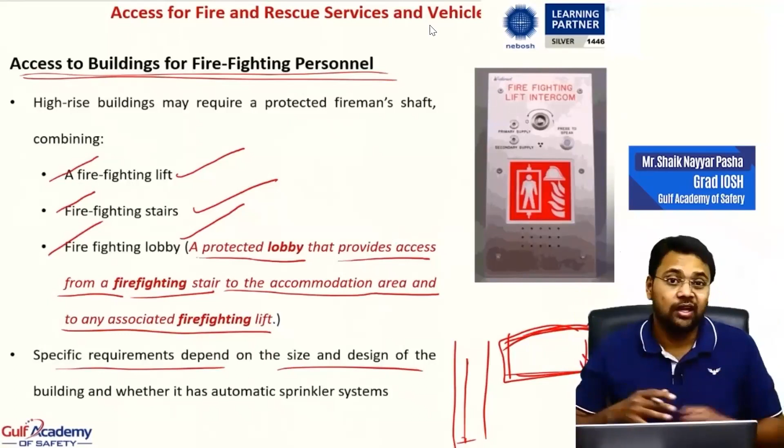In some organizations, more than one firefighting lift is needed. In some, more than 50 fire extinguishers are needed, and more fire exits are needed. That will be decided based on the size of the organization, what activities it carries out, and what is the spread of the organization. So those factors decide the firefighting equipment required for that particular organization or company.

Next, where firefighting cannot be done, you have to think about fire evacuation. Even fire evacuation procedures should be in place. There should be arrangements by the management so that fire evacuation happens without any hassle. Now, what are the arrangements for fire evacuation?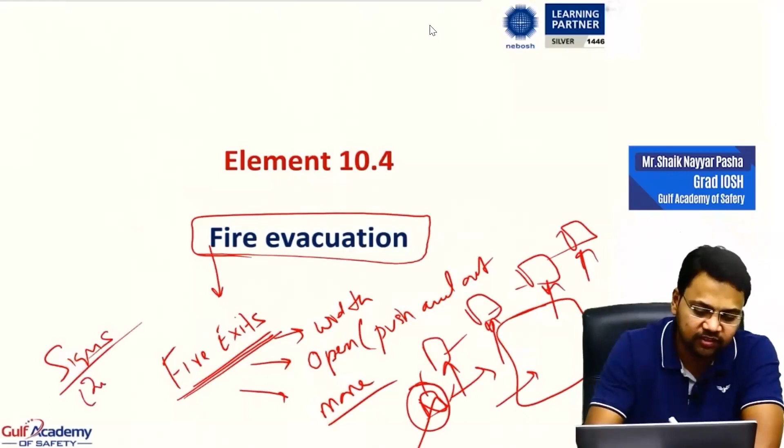Signs should be posted, arrow marks given showing where the nearest fire exit is. And emergency lighting should also focus on the signboards as well as on top of the fire exits.

If you are using a fire exit and coming out of the building, it should directly take you to the nearest assembly point or the safest place. It should not be like using a fire exit, going to a next chamber, using another exit from there, and going to another chamber before reaching the assembly point. No in-between deviation routes. Directly, the fire exit should take you to the nearest safest point, that is the assembly point. So these are the main characteristics of fire exits.

No use of lifts, obviously. You cannot use lifts in the case of fire accidents, only staircases or ramps, to take staff to a place of safety. More than one exit might be required. Traveling distance should be as short as possible. Adequate width, clearly signed, proper lighting, emergency lighting, and no obstructions. Fire exits should not be blocked by waste or any kind of boxes. All these are the general requirements of fire exits.

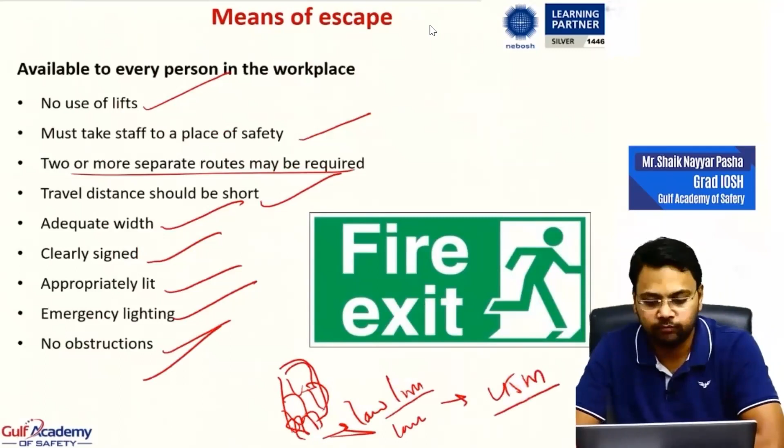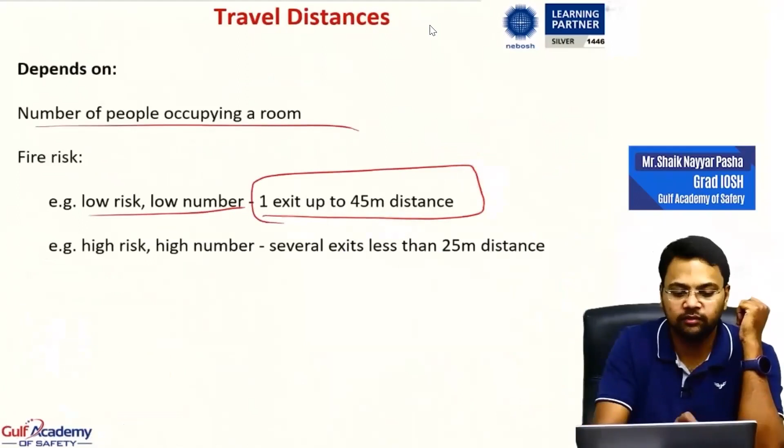For low risk areas and low number of workers, there should be a fire exit every 45 meters. For high risk areas with a high number of workers, there should be a fire exit every 25 meters, so that people can reach the nearest fire exit and evacuate the area as soon as possible. So: low risk, low number, one exit up to 45 meters; high risk, high number, several exits less than 25 meters apart.

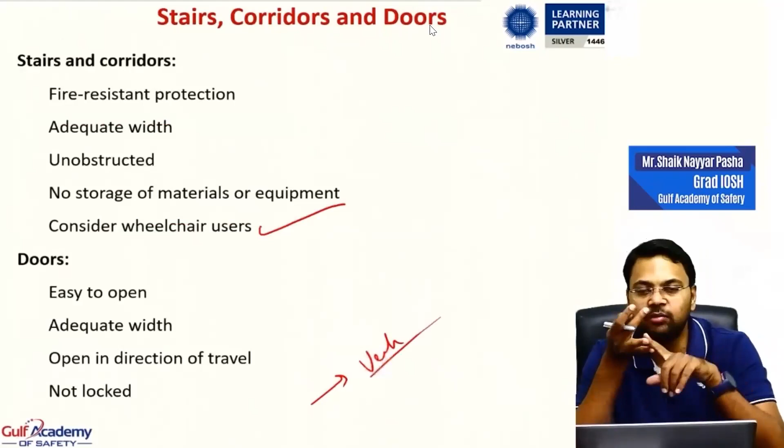Staircases and corridors should be fireproof and should not be obstructed. Emergency lighting should be there, and fire staircases are there. If exit staircases are there, they should also take you directly to the emergency or assembly point. Ramps should also be there, because if there are vulnerable people such as pregnant women or disabled persons, you can use wheelchairs to shift them to the assembly point with wheelchairs or stretchers.

Fire doors or fire exit doors should be easy to open, of adequate width, opening in the direction of travel, and they should not be locked. All these are the basic requirements of stairs, ramps and doors. Emergency lighting, as I said, is needed at night or where there is no natural lighting, particularly to indicate escape routes. There should be regular maintenance and routine inspection of emergency lighting, checking whether it is working properly or not, and replacing it immediately. That is how you have to do it.

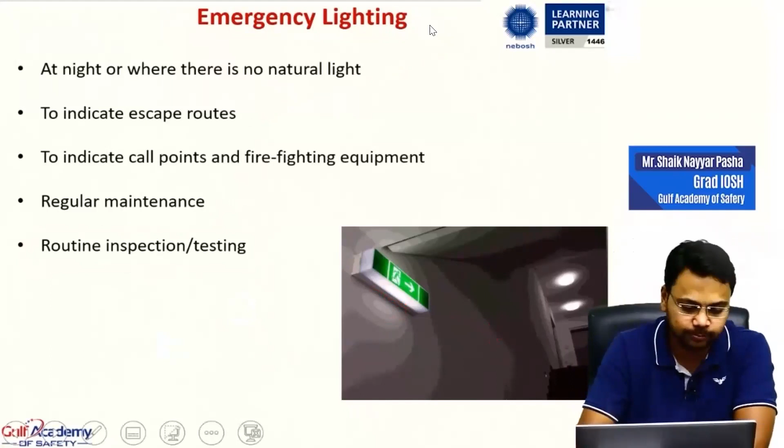Fire exit and fire door signs, we already discussed this. Assembly point: safe distance from the building. For example, if this is the building and this is the entrance, the safest place to have a fire assembly point should be sited in a safe position, not sited so as to obstruct the fire brigade. If the assembly point is right at the main door or main entrance, the fire department might not be able to enter. So it should be sited separately and not obstruct the fire brigade.

It must be a walkable distance. For example, if there is a fire in the building, we reach the nearest assembly point, but if there's a chance the fire can spread rapidly and reach that assembly point, a further escape route should also be possible. You must be able to walk away from the assembly point back to a public road if the fire intensifies or spreads more rapidly. It should be clearly signed, with a signboard.

Sufficient quantities are needed. Why? Because if an organization is spread across 10 or 20 acres and there is only one assembly point, is it possible that everybody can reach the assembly point in the quickest time? No. So that is the reason you need multiple assembly points, so people can go to their nearest escape area or safe area.

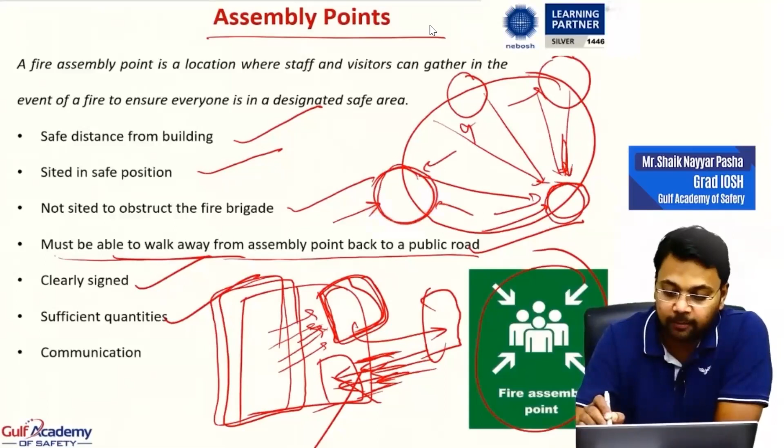Training and information should be provided to all workers, meaning in case of a fire, they know where to go. For example, in this area, a worker's nearest point is this one. If in confusion he goes somewhere else, when roll call is taken at that point, this guy is missing, so I might have to send a safety officer inside, putting the safety officer's life at risk because of a worker's mistake. So clear information and training should be provided to each and every worker on their designated assembly point.

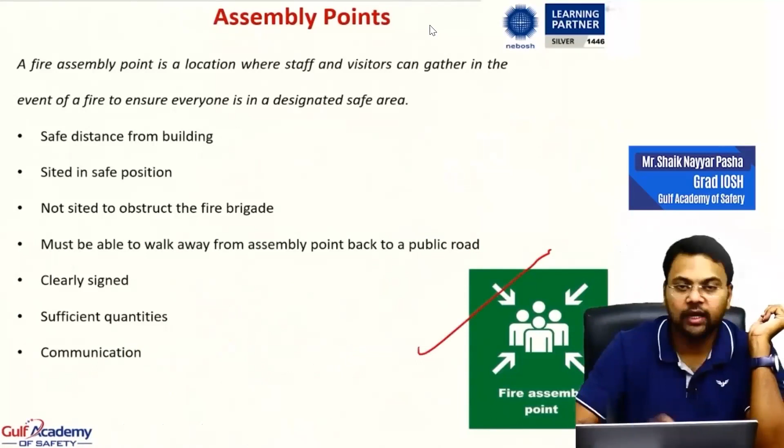Communication and information should be provided about the escape routes and which assembly point workers need to go to in case of an emergency. All these arrangements for fire exits, doors, windows, staircases should be available, and the same applies for assembly points.

Emphasis should be mainly given on sounding the alarm, getting out of the building and staying out. We'll discuss the evacuation procedures in our coming slide, including how the evacuation procedure happens and what is the role of a fire marshal or fire officer in case of a fire accident.

First, his responsibility is to check whether the fire alarm is real or not, checking all the fire extinguishers are working properly and fire exits are not blocked. Evacuating means helping in the evacuation of vulnerable people, taking charge of the evacuation process, and even taking roll call attendance. Once we evacuate the building and come near the assembly point, he will check whether everybody has safely evacuated or not.

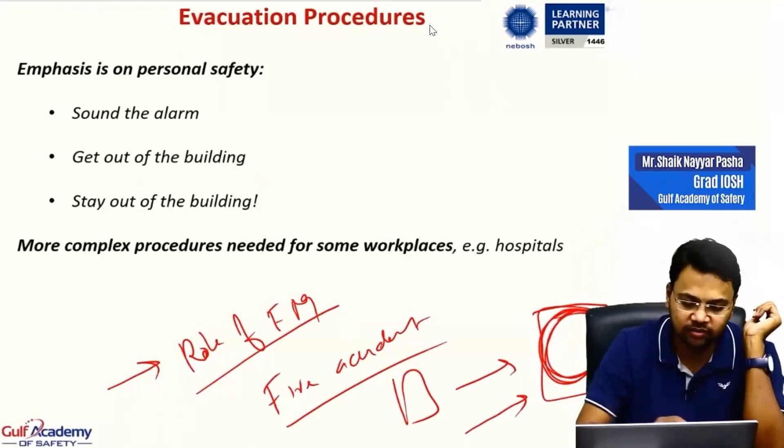All these are the roles of fire marshals in the workplace: check if the alarm is real, check all areas are evacuated, assist disabled workers or vulnerable people, ensure fire escape routes are kept clear, ensure windows and doors are closed, conduct roll call at the assembly point, and even calling the fire brigade can be one of his responsibilities.

In the event of a fire evacuation, special consideration should be given for vulnerable people. Even special equipment might be needed, such as stretchers or wheelchairs, so that they can be evacuated. These arrangements should be available if there are any special cases.

Now let us discuss the evacuation procedure. As soon as the fire is detected and the alarm is raised, the main power supply gets shut down, and emergency lighting switches on, mainly focusing on the fire exit signs, fire extinguishers, or fire exits.

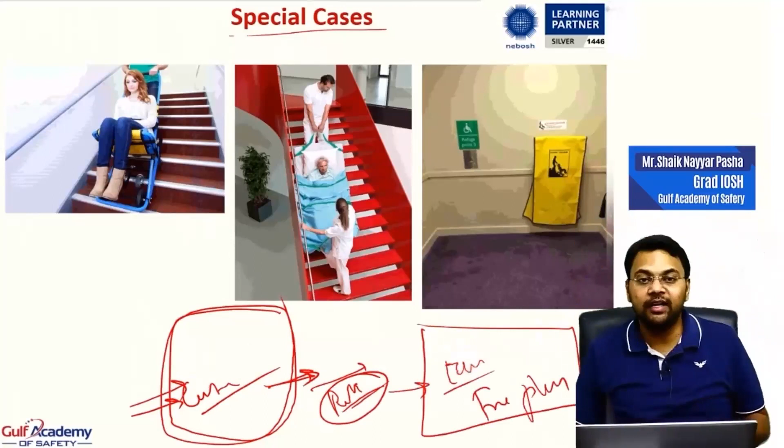We need to make sure that on each and every floor there is a fire plan for that building or that particular floor, so that the workers or customers can see where the nearest fire exit is and use it to evacuate the building.

It is the responsibility of the employer to conduct mock drills or fire drills once every year to test the training provided to workers. What is the benefit of testing your procedures or doing mock drills? You will know whether the workers have understood the information provided. If not, at least we will know the loopholes and limitations of the evacuation procedure, and we can find a practical solution to improve next time.

So recording, training and testing your procedures is more important, right? This is the fire evacuation plan for a building, just as an example.

Assembly point, fire exit, fire exit, fire exit, fire exit, fire exit. Manual call points, call points for alarms. There is a fire extinguisher as well as a fire hose here, and another fire extinguisher. This is a geography room based on that particular building. Fire alarm or fire call point. Water closets, washrooms - this one for disabled workers, this one for normal workers. So this is the proper plan for fire evacuation for the building.

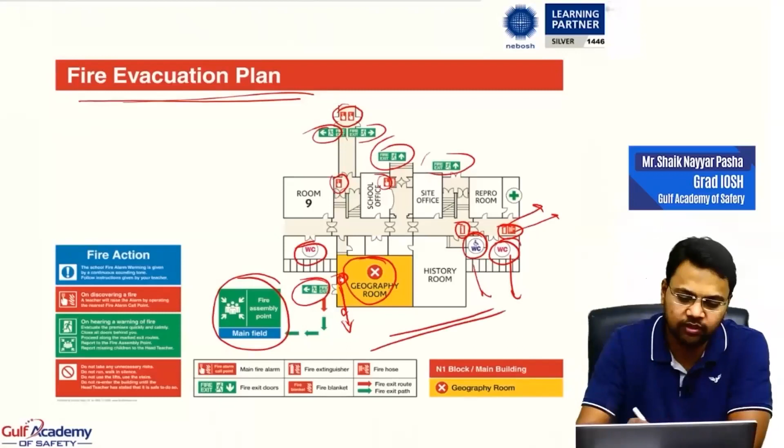This plan should be available for buildings. If there are multiple floors, this plan should be available for each and every floor. You can see main fire alarm, fire extinguisher, fire blanket, fire hose, fire exit doors, fire exit route map - all these should be available for each and every building, right? With this we complete our element 10, which is fire safety.

So that was about our element 10, which is about hazards and precautions associated with fire. So, yeah.

Any questions that you want to ask? Good evening, sir. Good evening. Sir, can you please explain the evacuation plan once again?

The simplest evacuation plan is: as soon as the alarm raises, all workers should reach the nearest fire exit and reach the nearest assembly point. That is the simplest plan.

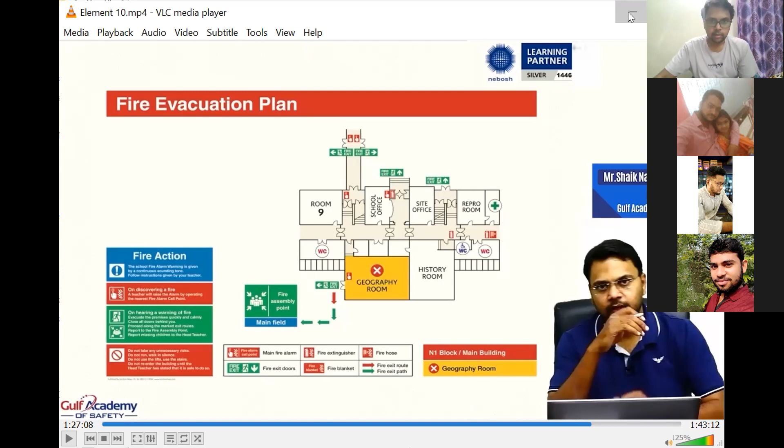Sir, I have a question - how to calculate fire load in any organization? Fire load means, sir, if any organization keeps flammable materials or combustible materials, how to calculate the fire load? I don't know deeply about this, but...

There are many factors that need to be considered - what kind of activity is happening, whether it is temporary work or routine work, what quantity is stored or what quantity will be used, what are the existing control measures. So various factors are considered when discussing fire load, depending on the size of the organization, what operations it does, what quantity, what kind of fuel is used. So various factors need to be considered.

Sir, any formula for fire load calculation? No particular formula for fire load calculation.

So have you started the first four elements once again or not? Yes, sir. What have you started? Element 1, element 2, sir. So anybody else who has started or still not?